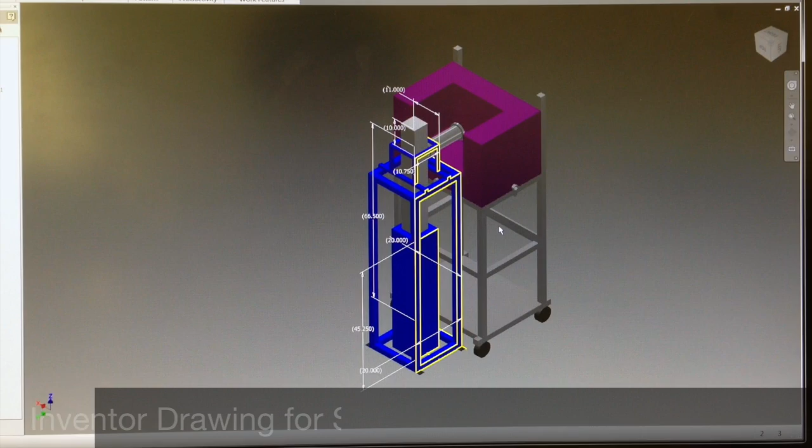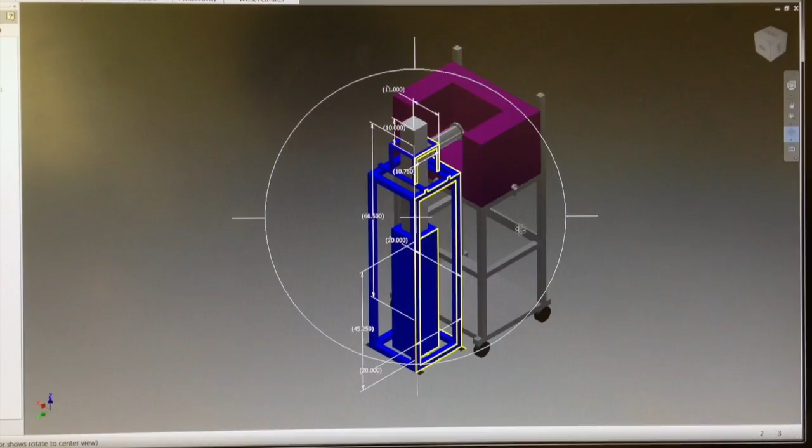After running simulations with MCNP, a software that simulates neutron reactions with other surrounding stuff, the supporting frame was designed to be stable and movable for holding an 8-inch thick borated polyethylene board and several inch thick lead sheet on top of that. And as you see here, this is the beam stand and this is the shielding support frame. When the beam comes in this direction, it will be shielded by the borated polyethylene board with some lead shield around, and the joint component looks like it should work, and the actual mechanic job will begin soon.

Another project is to design our own MIBL cooling system using Inventor too. Creating extreme situations to run experiments, overheating is also a headache for the equipment. A cooling system is therefore very important to prevent our facility from having a fever. Considering the limited space inside our lab, the system should be both efficient and small size. With the help of Inventor, the MIBL cooling system can be created by using the 3D assembly model inside Inventor.

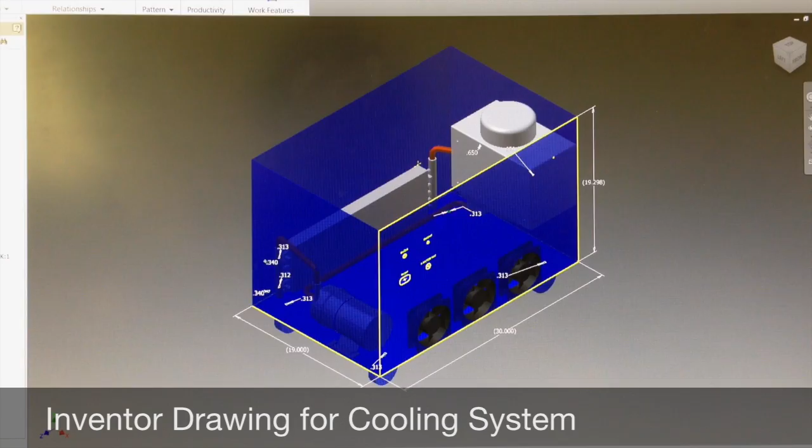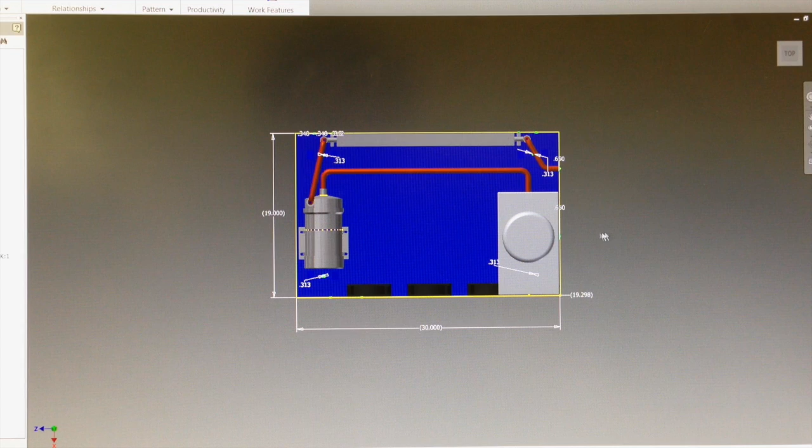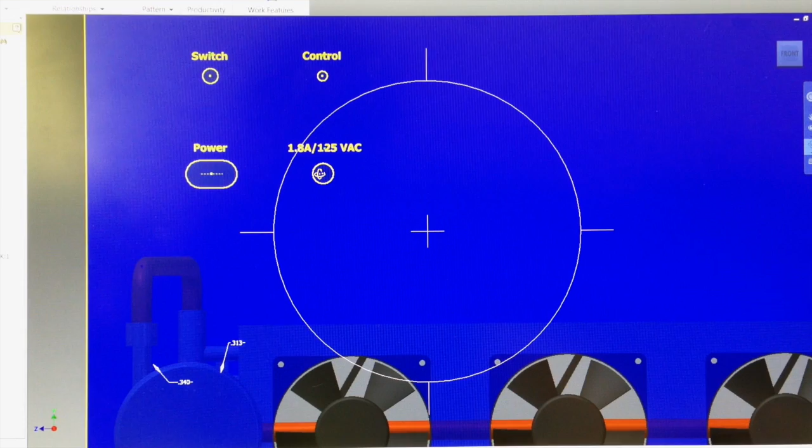As you see here, this is our MIBL cooling box and it looks like that. This is a 3-gallon tank that contains all our cooling fluid, and the cooling fluid will run through this pipe, come to the pump, and the pump will pump it through the cooling fans, and continuously the fluid will go outside, cool what it should cool, and run back from the hole here back to the tank. And to be movable, there are 4 wheels on the bottom, and in the front we also created a front panel with switch control and power, some LED control, a power plug and fuse there so we can control the whole cooling box.

For the electronic stuff, a database has been created by using LabVIEW. When I mention database, a lot of people may think, why don't you use SQL or MySQL? The reason I chose LabVIEW is because LabVIEW is a very commonly used software in our lab, and this choice can avoid some difficulties and problems dealing with data transformation from one port to another. What's more, LabVIEW has a very powerful file input and output tool called the TDMS function. By using the VIs' built-in TDMS function inside LabVIEW, you can achieve the same goal as using MySQL, or even better.

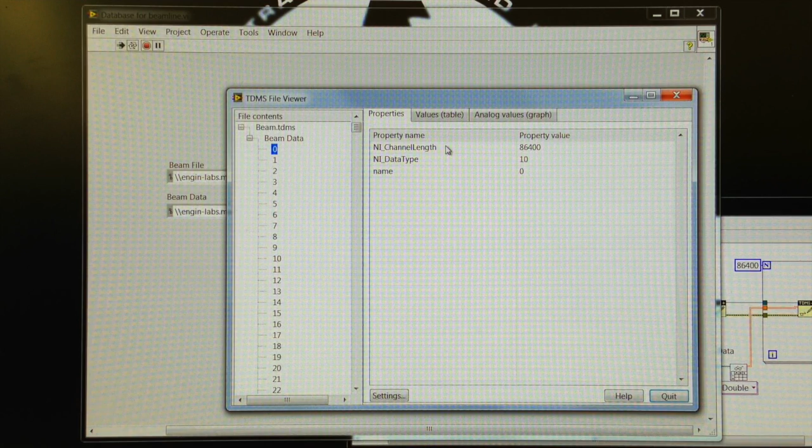Say we have 1000 data points in one row, and we're going to update those variables per second for 1 day. For now, we simulate a data file that contains 0.11 and repeat that 1000 times to represent 1000 columns, using the advanced TDMS function to simulate that. After running the program, a TDMS viewer will come up, and the data channels go from 0 to 999. That's 1000 columns and 1000 channels. And you can see here each channel length is 86,400, and it has the value from the top to the end. It's all 0.11.

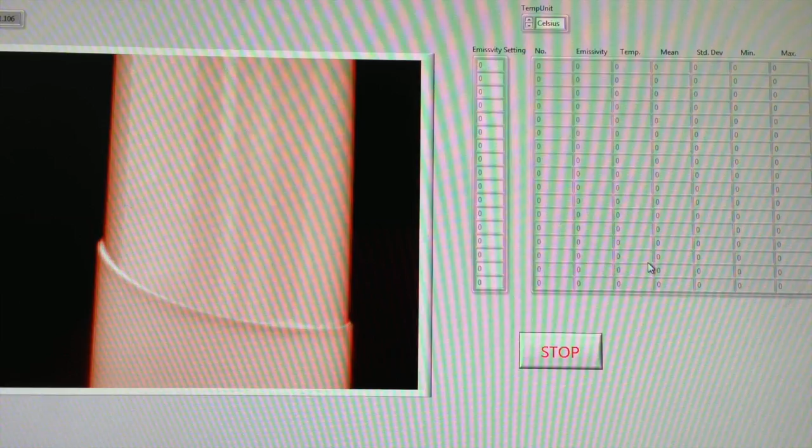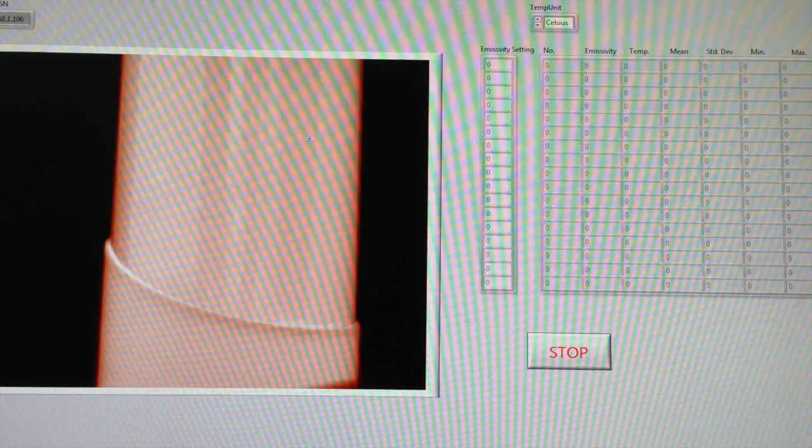Last but not least, I have developed a user interface for choosing regions of interest on a thermal camera image by using LabVIEW too. Dealing with material under high temperature and high radiation dose, analysis of the thermal image will be very helpful to understand how and why the material properties change like that. Now you see this is the user interface for the thermal camera image, and on the left hand side it's a live picture of a water bottle filled with hot water, and you can see my hands moving.

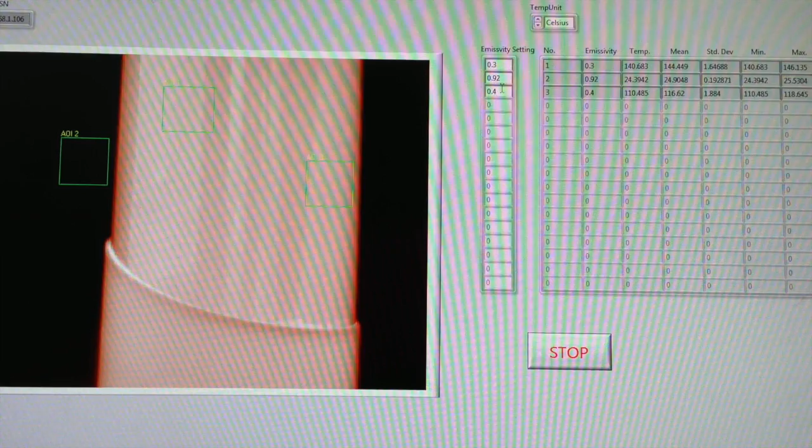First we can choose ROIs, which stands for regions of interest, and by holding the control button we can choose several of these, as many as we want, and after that we can assign emissivity to them. Now you see the arrays keep updating on the right hand side. But rather than just choosing ROI then assigning emissivity, we can assign emissivity first, then choose ROI. That way it works fine. Now you see we assign 0.8, 0.3, and we can choose ROI 5, ROI 6 for it.

And you can see the emissivity, the temperature, the mean, the standard deviation, the minimum and the maximum values for the ROIs we choose shown there. And we can change the temperature unit too: Kelvin, degrees Celsius, Fahrenheit. There are different temperatures according to the different unit we choose. The array will keep updating as we want.

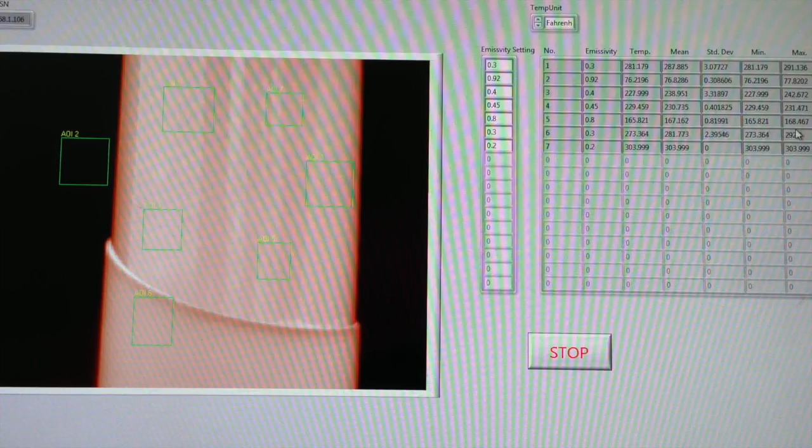And now you see we can assign as many ROIs as we want. Also, if you type a wrong emissivity and want to change it, that's fine. Now you see after typing the new value and hitting enter, the value will keep updating as we want. And that's it.